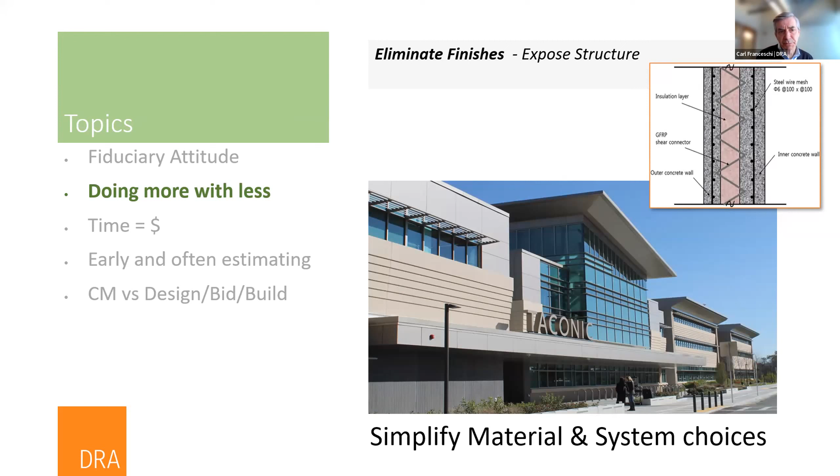That interior finish can simply be painted and become the interior. We discovered too, not only in the shops but in projects where we're stacking classrooms above shops, we actually use the inside concrete finish as the finish in those classrooms—so there's no drywall, no metal studs on the perimeter wall. Again, doing more with less, using one material and exposing the structure, somewhat the same way people are attracted to polished concrete floors. Why add a finished material? Use the concrete itself as the finish.

Particularly these days, as escalation and inflation affect our projects in a very serious way, saving time is a way to save money. And that includes in the design phases, of course, not just the construction phases.

A couple of things we do regularly are overlapping activities during the design phase. We're doing programming at the same time we're checking out existing conditions. We're doing conceptual design while we're still refining the program. There are ways to reasonably save fairly significant time during the design phase.

Thinking about the construction phase, which is generally a longer period of time, we try to simplify and develop logical, constructible sequences and procedures, material choices, systems choices. We find we want to include people on our design team, both in-house and out of house, who have that constructability and construction experience to have input.

In a lot of the choices being made early on, even in conceptual design, our project managers often act as construction administrators. They bring back feedback from the field so that we try to design buildings in a way that can be logically built, and built more expeditiously.

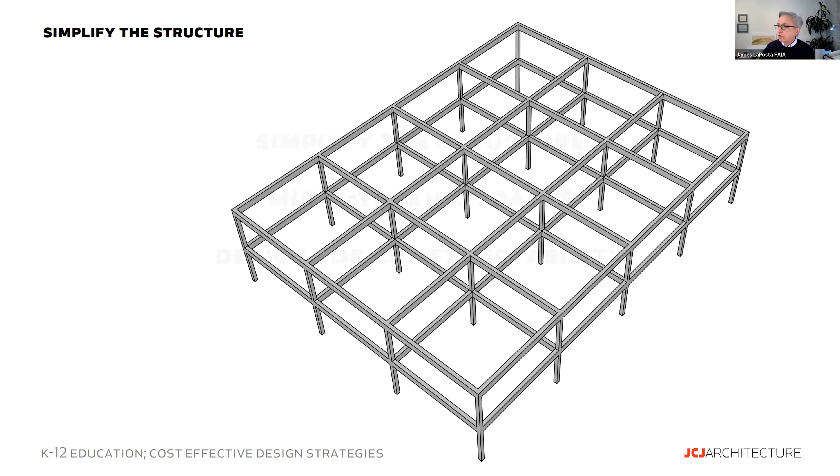If you've got a big open field - the hardest project I ever built was a high school in a tobacco field in Connecticut. I didn't know what to do with it. It was just a big flat open plain, and there was nothing - we were looking for a hill. I really wanted a hill. So the question is, what do you do then?

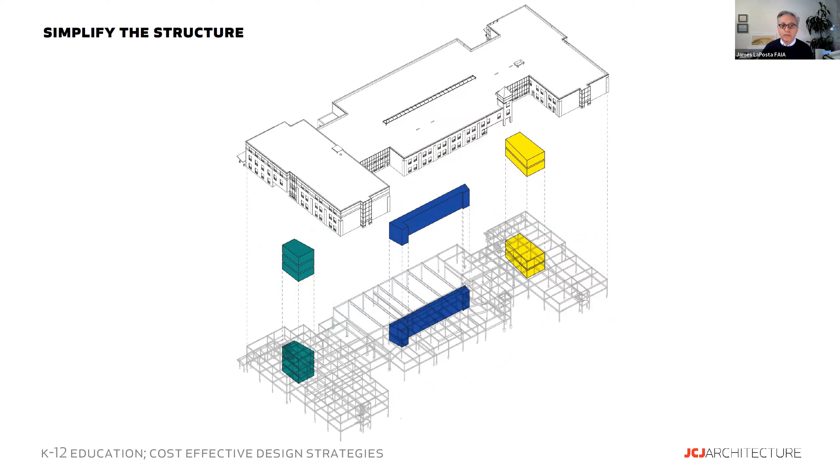You can carve spaces out, get a rigorous, simple grid, don't get too clever with it, and then begin to carve the spaces out of the inside and even expose the grid. This example at the Hunking and Haverhill was one where rigorous grids, simple building, but within there spaces that could still be light-filled, fun, joyous, letting some of the structure be exposed, getting interior daylight, getting flexibility, getting visibility - but you can carve away at those without having to really mess around with the structure.

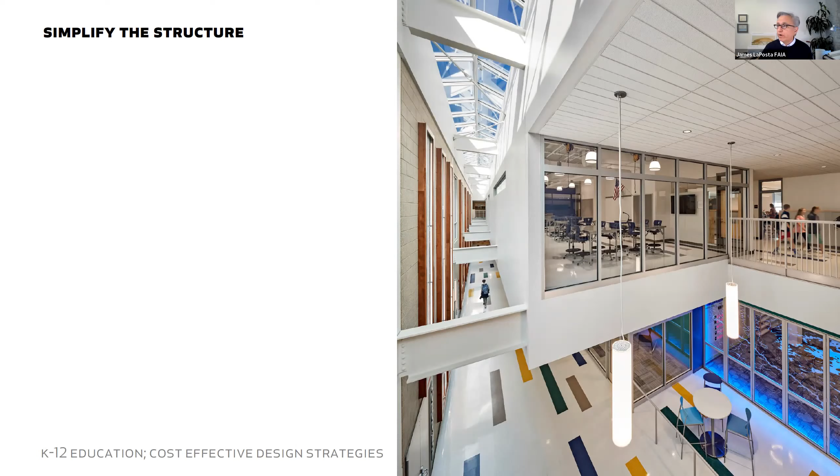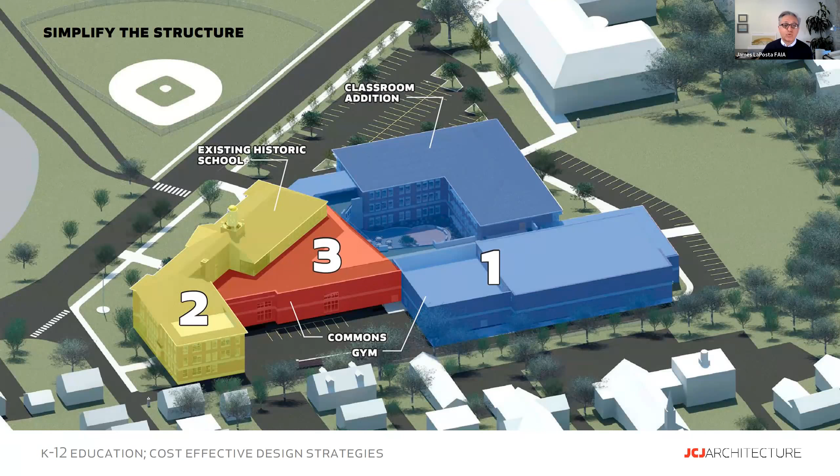That just becomes the residual space in between these really simple boxes to build. You're sort of connecting the dots. And this becomes a space that then is relatively inexpensive because you're not spending money - you're getting an exciting space, kind of connecting the dots, for the cost of a curtain wall and a few trusses, because the building around it is simple and easy to build. So you're able to focus your energies and your attention in a very, very specific area.

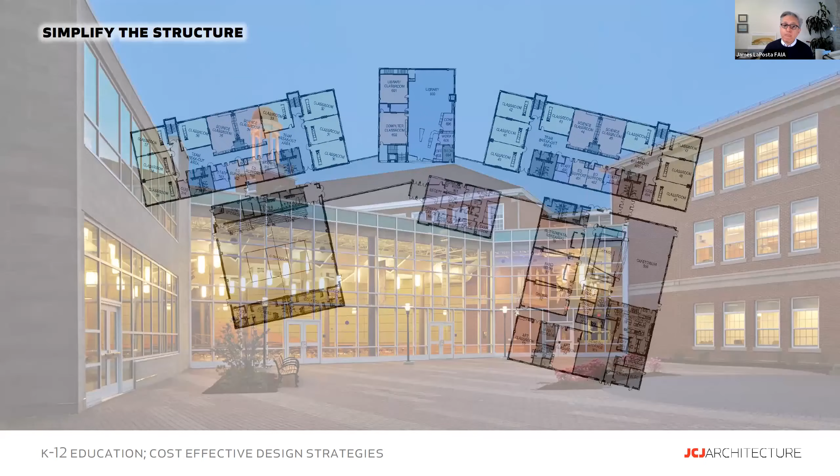This project freaked out the construction manager when we first showed him the plan when they joined. They saw angles and they were quite upset, so they thought it was going to be very expensive. This is an elementary school, but the reality is it's a series of boxes. So it's a new building taking that same approach of a simple structure. It's 6 boxes that are just connected.

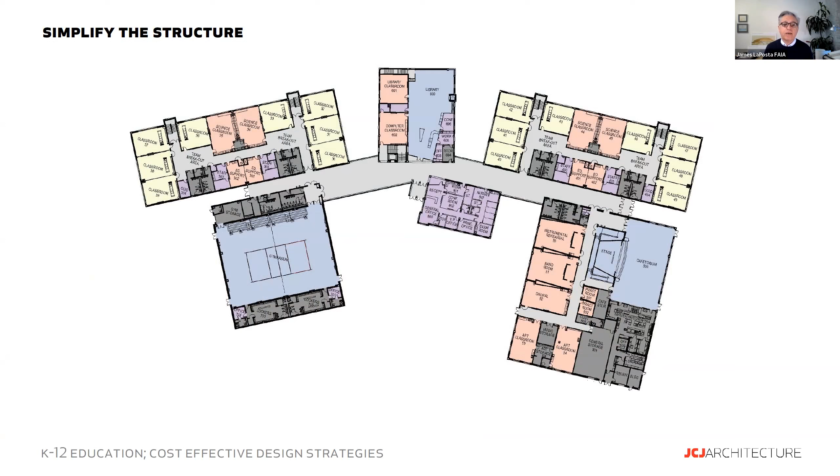Connected by storefront to create some exciting space. What this allowed us to do, by keeping the structure simple and repetitive and the form simple and repetitive, really allowed us to kind of go vertical and play around with the section, creating this village atmosphere really inexpensively just by connecting these simple boxes with storefront. It was just a question of leading the CM through this.

And once they understood the approach, they said, 'well, yeah, this really isn't too bad - we're building 6 rectangular buildings, and then we're just running a foundation wall and some structure in between.' And with that, again, in these residual spaces, you can create some really interesting indoor-outdoor relationships and maybe spend a little bit more on the connecting structure, because the structure in the majority of the building was extremely, extremely simple.

Last example for this topic is this project, a whole campus we just finished. This kind of gets at the time as money too. This is a really simple plan, for a Native American community south of Phoenix. This whole project is about 125,000 square foot elementary school, 14 months from the time we were hired to the day the school opened. That required a lot of early packages and thought about the structure and the systems available in the community.

So this ended up being a bearing wall CMU project with joists, and it had to be kept simple. As you can see from the plan, if you're doing bearing wall and joists, the more repetition, the better, the simpler it can be. It could be a really boring project.

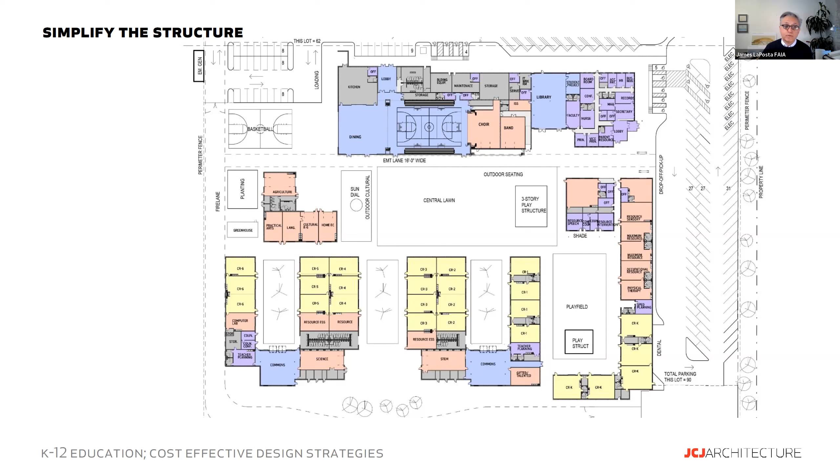Luckily, it's a lot of outdoor space, so you can take advantage of creating things like courtyards. But what this allowed us to do was have them build the classroom buildings and the base of this, and then have a moment in each courtyard where you could spend some money and do something exciting, because the rest of the building was so repetitive and based around the systems available in that particular community.

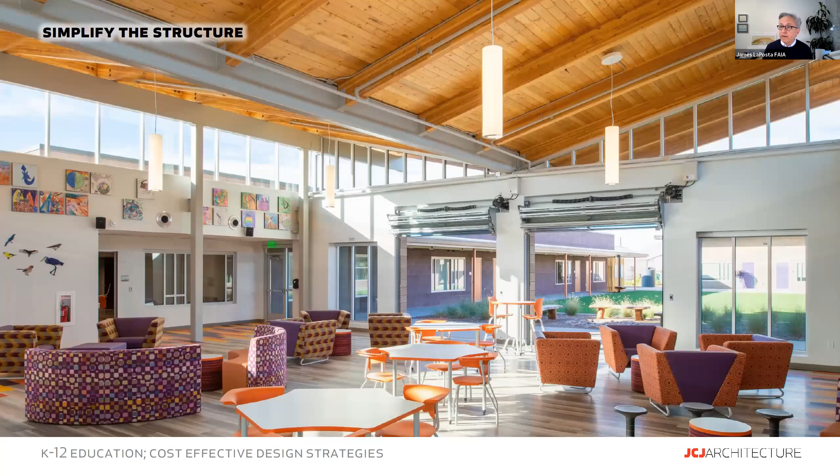So every cluster of classrooms ends up with a common space. And even here, it was a switch of structure. They were able to do the wrapper first, and then came back in later with the longer lead items in terms of the structure for these butterfly rooms. So this became a question of working early with the construction manager to make sure we were selecting systems they could get quickly, build quickly, and build cheaply. The repetition was really part of that.

But again, I think through section, you can begin to create some really wonderful and joyful spaces. So something we were calling multitasking spaces, very similar to multi-use spaces. I want to expand on that a little bit. In this case, this was a middle school that couldn't afford programmatically the choral room they needed. They had a big band and choral program, but programmatically they were up against the money.

So this was a case, as I'm sure we've all done, of using the stage to create an extra teaching space. But the question here really was, how do you do that and make it a real teaching space and not just a stage with chairs? That involved making sure it was on an outside wall, had a window, had all the things it needed, and then spending a little money on an acoustic partition between that and the commons, so that when it wasn't being used as a stage, it was truly a teaching space, which it is most of the time. They used it as a stage rather infrequently.

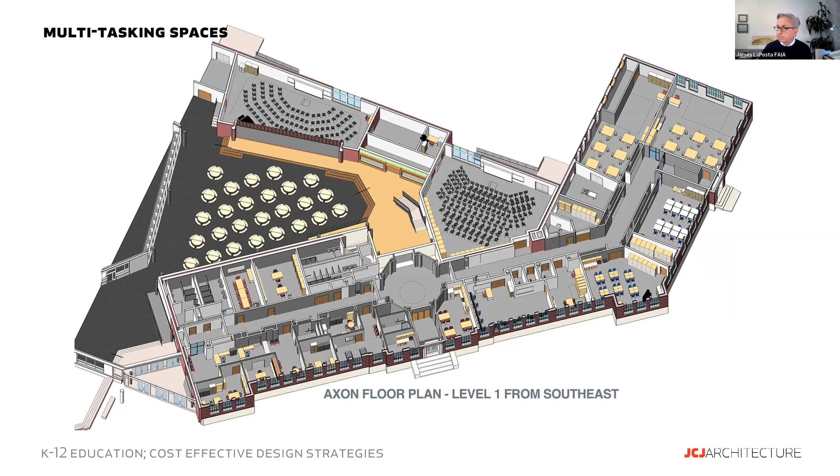So this is that space. Again, it's the residual space between some very simple masses. This is in the stage configuration. And then for lunch, when it's a classroom, it's simply a door that's got a very high STC. Spend the money on that detail as opposed to on an entire extra room. It's been a quite successful and rather cost-effective space.

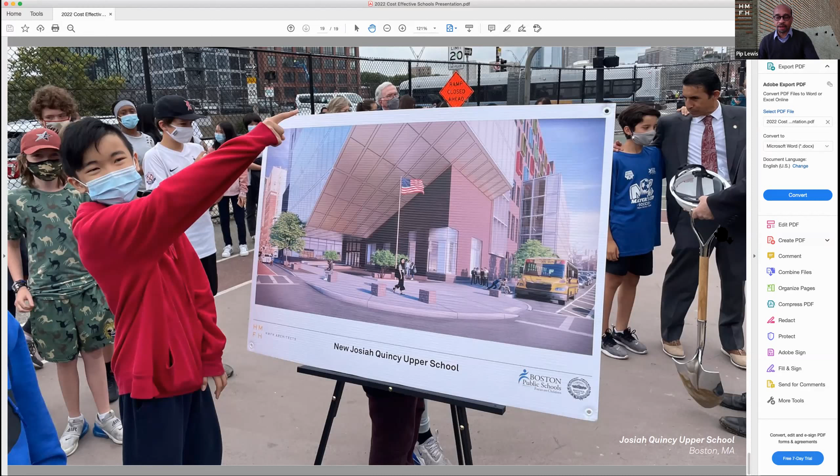Hey Pip, just want to make sure you're on the slide. I'm seeing the Josiah Quincy. Oh, let's see why that is. Tina, is that what you're seeing? Yep, there now you... So I'm going to unshare and share again.

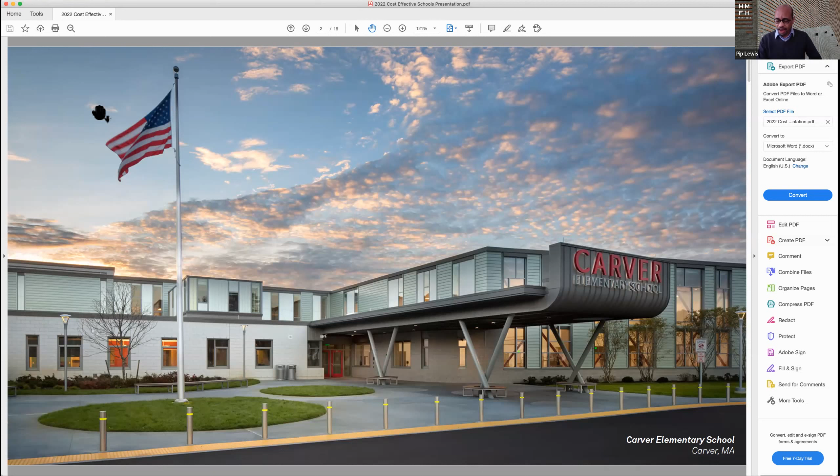Carver invited us into town at a time when they had this project voted down twice, so we really had to assure the community their money was being spent wisely. This is a story about very simple shapes, simple, inexpensive but durable materials. As was touched on by Carl, this is a pretty straightforward building on an open site, a two-story elementary school. It was done in Chapter 149, not CM at risk, but design, bid, build. We think the competition we saw there really helped drive down the costs of this project, which came in at $338 a square foot, and it was completed in 2019.

The building is clad in concrete block, which we use in a few different textures, colors and patterns in order to give it some life. It has moments of really inexpensive metal siding to accentuate that. Inside the building, we created this fantastic library that people really love, but really it's just a cube of old-fashioned Kalwall, to create this sort of crystal enclosure for the library.

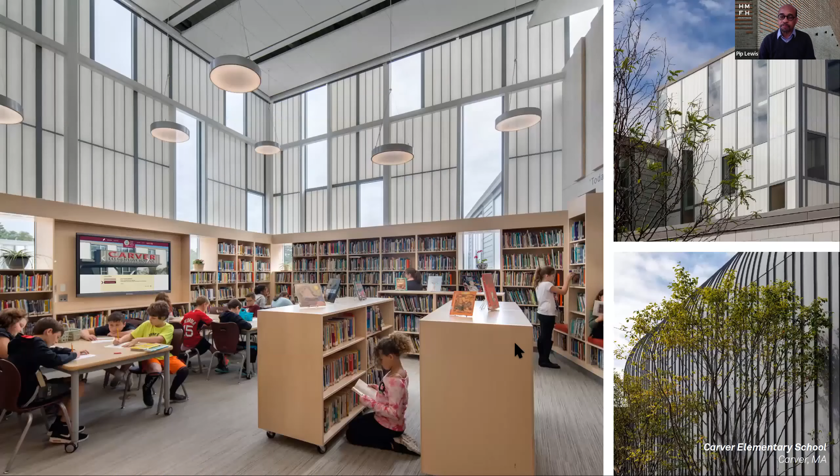Hopefully this will work, but here you see the concrete block building with a few moments of metal panel. And if we proceed, we get to the library, which is a Kalwall, an old-fashioned, I call it Kalwall enclosure, but in this case used to wonderful effect to create a really uplifting library inexpensively.

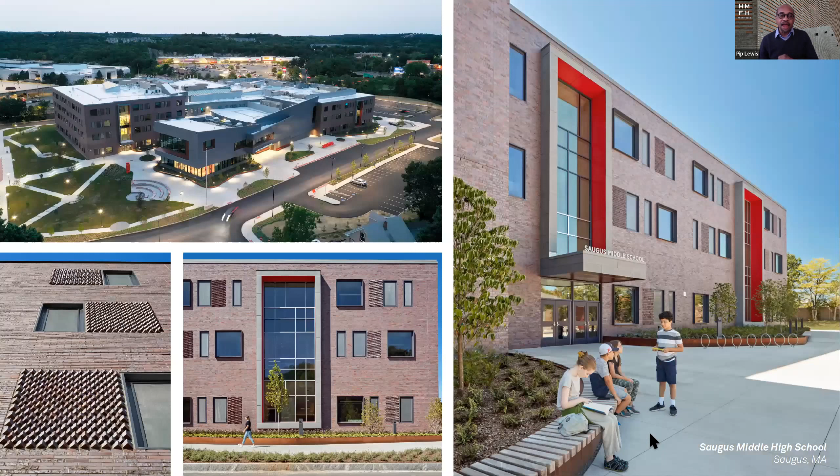But it's actually the element at the front of the building. If you look at the building itself, it's actually mainly a couple of large boxes of flat roof, regularly shaped brick-clad building. We have found that repeatedly, masonry, either CMU or brick, as we look at so many different materials to clad a school with, repeatedly comes up as the most economical. It's very durable and low maintenance, which I think is part of cost effectiveness. Another thing we find is that communities find it attractive and tend to love it and accept it very well. We're able to do certain special details, as you see on the brick, that can dress up a simple brick enclosure without causing a large increase in cost.

Inside of the building, just a couple of things to touch on, because the previous speakers went into great detail on how we work to simplify costs and get the best use out of space. One of the ways of ensuring a new school building doesn't look institutional is by the treatment of the corridor spaces. I just want to talk about durable materials here so it doesn't get beat up. We've found repeatedly that ceramic tile is actually still a very cost-effective way of providing a durable, long-lasting, and attractive way of protecting the surfaces on a corridor, particularly when a lot of the corridor space is taken up by lockers.

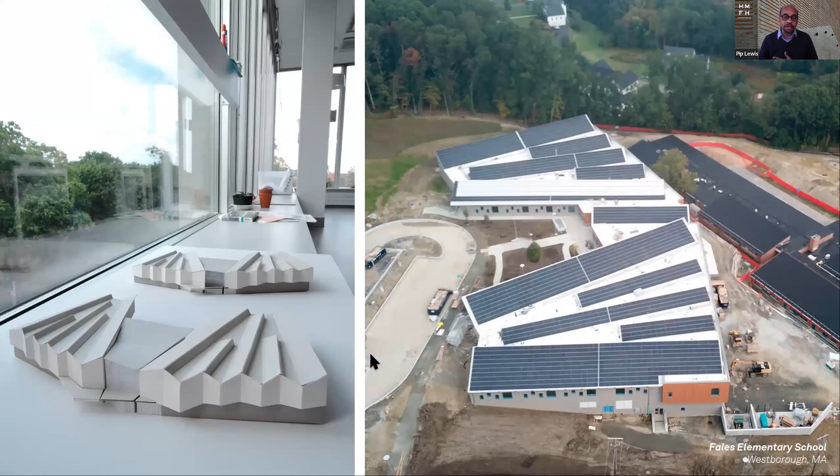The Fales School is an interesting project because the town really wanted to do a net zero building, and it's sitting on a steeply sloped, beautiful site with lots of trees around. So from the very beginning, we wanted to shape the building to take advantage of the views downhill to the east, and the sun to the south. That helped shape the way this building was going to look. It's occupied now, but the site is still coming together this spring.

The building, we're happy to say, has turned out to be not net zero, but the MSBA's first net positive school building, where we're generating more electricity than we're using. This was very important to the community. In order to do that, various components, geothermal and photovoltaics, had to be worked into the building.

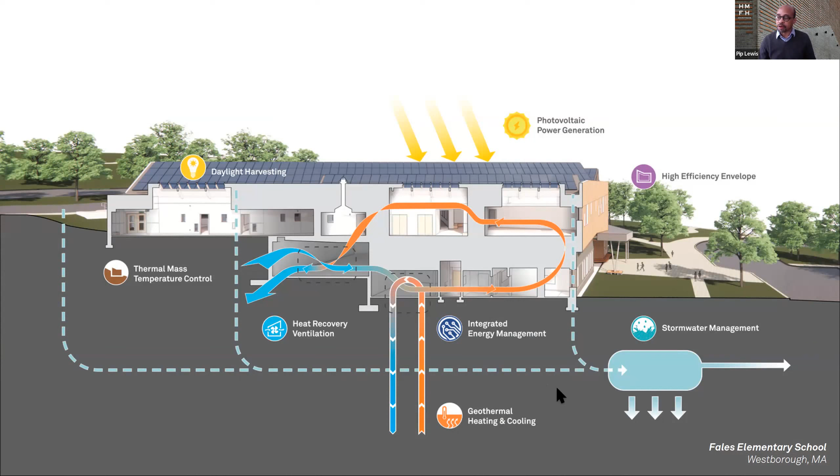We had to meet our budgets, which meant the cost management we needed to do for the project really needed to occur in other places. So what we did is, while we used some of this wood panel-like material - it's actually not wood, it's phenolic resin - to reflect the emphasis the school has on nature, we concentrated that at important places on the school. The main classroom wings are really large expanses of straightforward concrete block, acting as background to the emphasis we were trying to make. In that way, and with using the graphics inside, we were able to keep the costs of the building down. But I wanted to focus at this point specifically on the photovoltaics for the building.

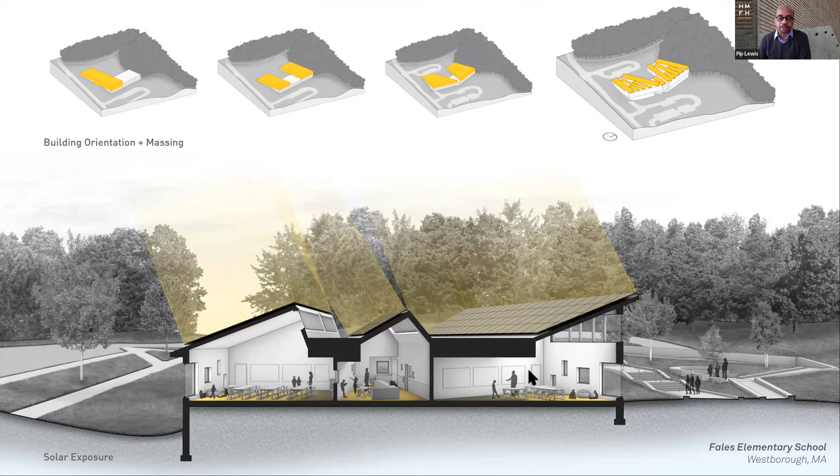The building is really designed around those photovoltaics, and the question is how the community could wrestle with the cost of paying for this system. The way I've traditionally looked at it is a simple payback model: you take the cost of the system, which in this case was a little over $1 million, and look at the annual savings of the energy made on a yearly basis, which was $172,000. In this case, that meant it would take 6.2 years to pay back the cost of the $1 million investment.

So would the community go for this? Well, that's a pretty good number for Westborough, but 6.2 years to get your money back - the answer was maybe, maybe not.

But the town and HMFH looked at it very differently, because we realized that in actuality nobody puts down $1 million to pay for photovoltaics or anything. This is part of a $50 million project that was paid by municipal bond over 20 years. So the community said the real thing they want to look at is the impact of that $1 million on the photovoltaics, financed over 20 years, compared to the energy it's generating.

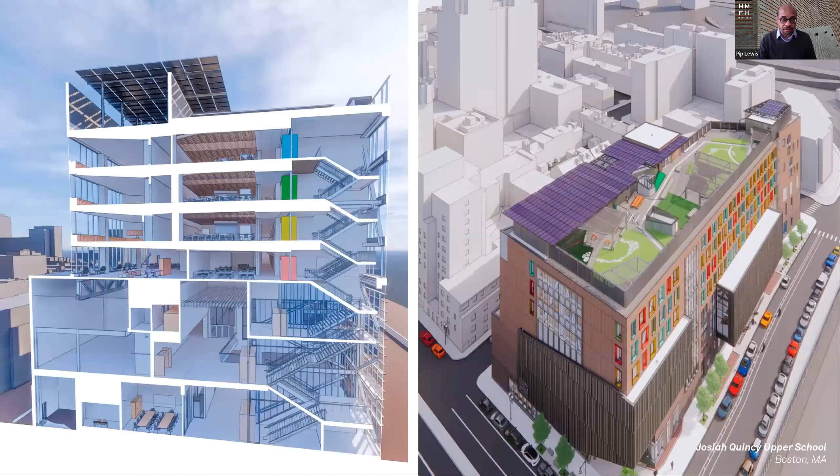Talking about the complex urban projects. This is the Quincy Upper School, which is just starting to come up now in Chinatown of Boston. And as you see, it's a high-rise school with a pretty complex section indicated here. And we have attempted to put what photovoltaics we could on top of the building while sharing the rooftop with an open air educational space, because this is the only open space that the project will have.

And we found we were able to squeeze in some, but even that we could get in was pretty expensive because it had to be built on steel structure supported over the rooftop HVAC equipment.

And so when we look at the numbers for that, it's very different than what we saw at Westborough. While the system itself costs about $600,000 to build, we were generating about a third of the electricity that the Fales school was actually generating. And with a 20-year bond for the city at a 4% rate, the cost of that was $42,000 per year, which is still sort of favorable compared to the energy generated at $69,000 a year.

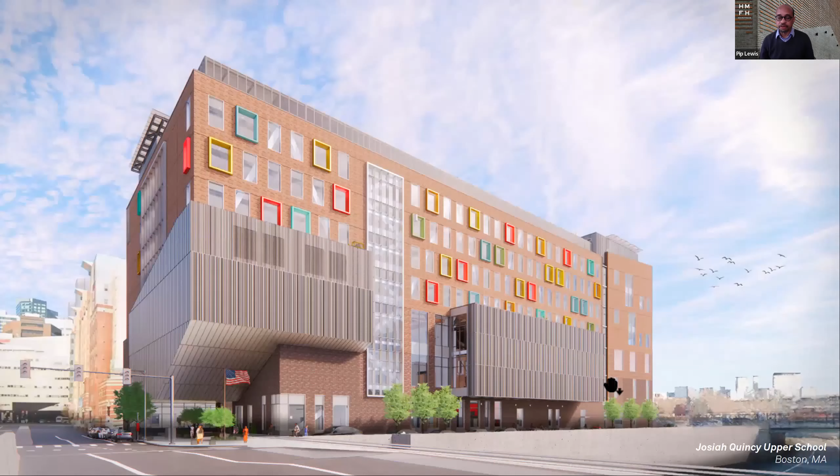So the city determined that no, the savings here are too modest. They would take that $600,000 as one of many value engineering measures that needed to be taken in order to make the building come in on budget. So we are doing the building now without the photovoltaics.

But we also had to, in order to get on budget, we had to cut back the size of that rooftop open space that we have. It's still there, but smaller than what we were hoping to do.

And what the city hoped would be a slick glass box sitting on top of these beautiful terracotta masses became, once again, like a lot of public schools, a brick masonry building. That was the most economical way of building this, even in downtown Boston. And the terracotta masses became an industrial metal siding where we just mixed up some standard profiles in order to give it a nicer look than usual.

So remarkably, we have been able to stick to the original budget for Quincy Upper despite the difficult times that we're working through. And it's still scheduled, despite the supply chain problems, to be open the summer of 2024. So it really was the pandemic that sort of forced the city and HMFH to really look deeply at ways to make this an extremely cost-effective building in order to make it actually fly.

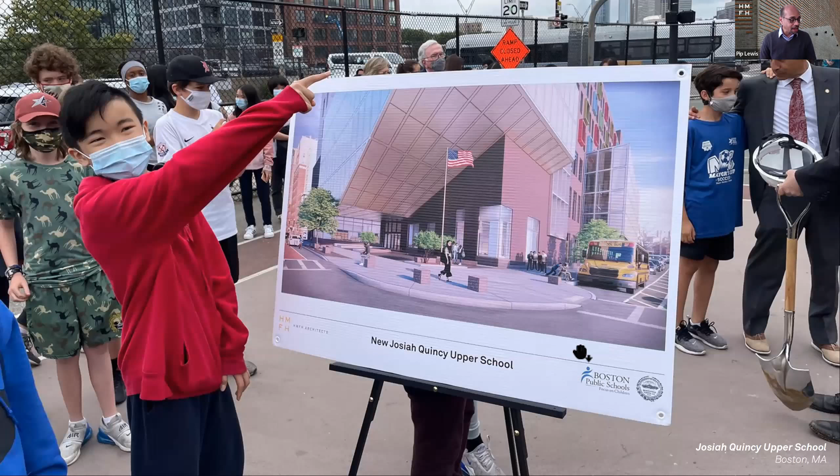And so the ground was broken last fall, and you can see this third grader here is very thrilled and looking forward to when he gets into the sixth grade, and he'll be able to inaugurate this first exciting new full service middle and high school in downtown Boston that really was shaped by the cost effectiveness that was imposed by the pandemic in a funny way.

And that's my presentation. So thank you. Sorry for all the technical problems at the beginning, clicking on the wrong thing to share.

No problem. That's great. That's really interesting, Pip. Thank you so much for sharing. It's good to see the kids at the end of it too. So last but not least, Frank Tedesco will share.

Frank, I don't know if you have slides or. I have a couple of PDFs I could put up. Okay. I share the screen. Can you see that? Not yet. Let's see. I don't know how to put this up on. I don't know if another option, Frank, would be if you wanted to email it to myself or Tina. Okay. I might be able to pull it up. All right. So.

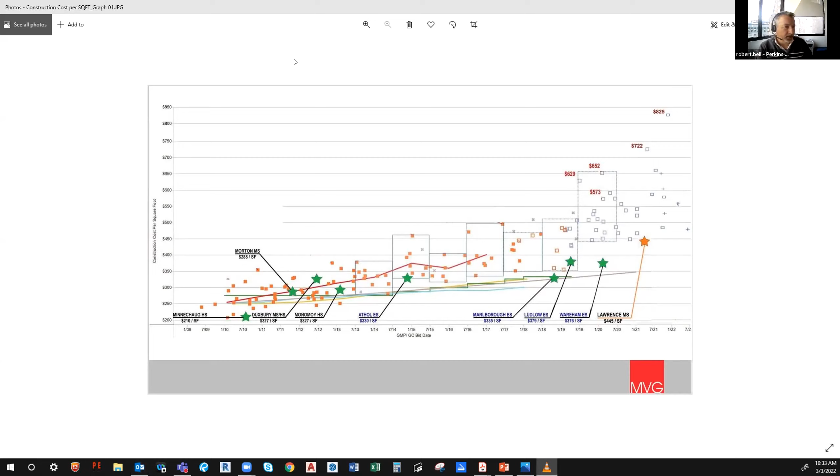If you could, I have a short video of that project that I sent you. Rob? Yeah, I can pull it up. There probably is going to be an audio issue. I'm not sure. No, there's no audio with it.

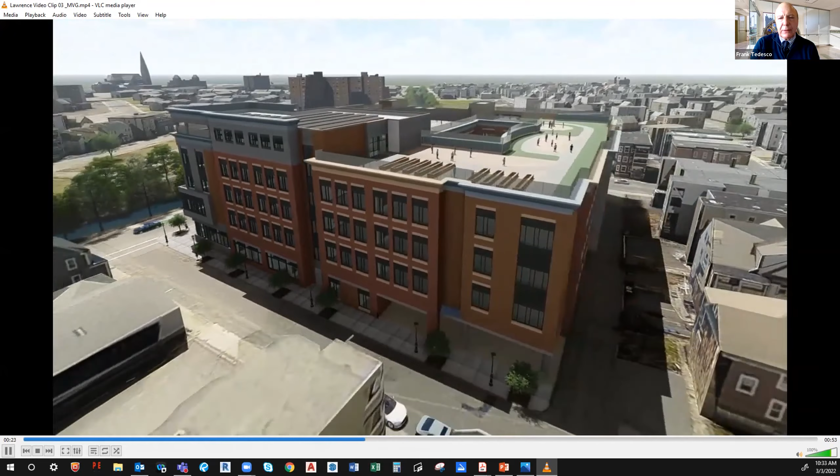So this is the new Leahy Elementary School in Lawrence. As you can see, it's a curb-to-curb urban project with all of the urban issues that you have in any city, where you really don't have any site space, no laydown area, and so forth. The project is at $440 a square foot. It has a rooftop play area and various other things that need to accommodate the students in an urban setting.

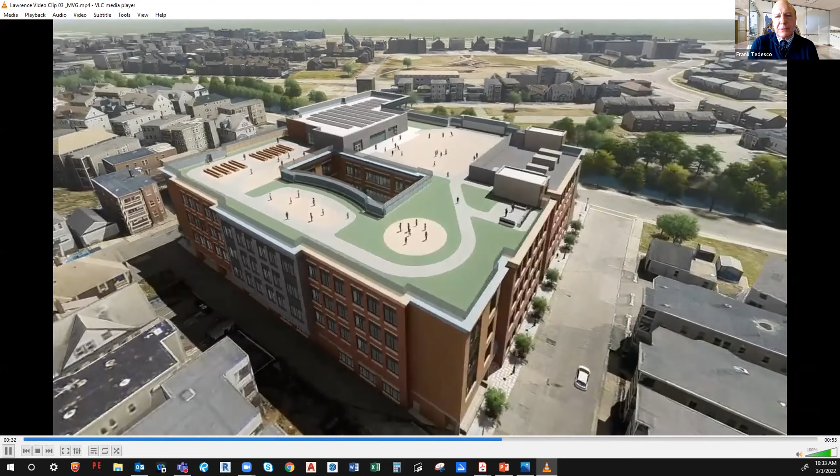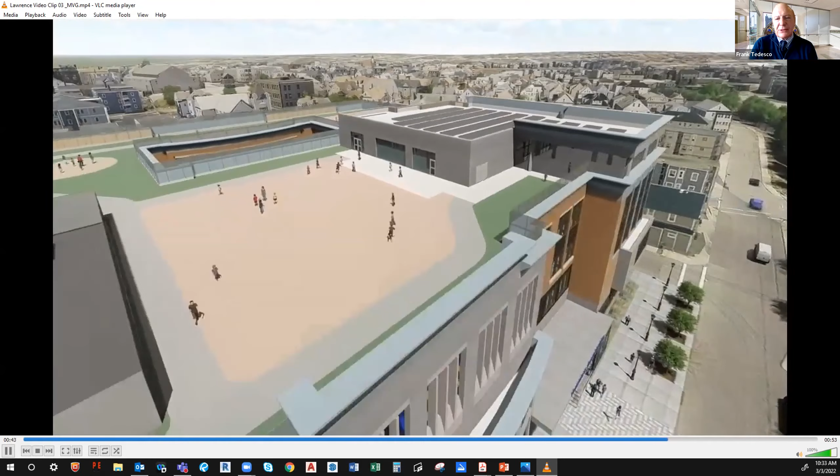My point is, even though that was showing the lowest cost of all of the projects in this cycle, you can see that this is not an inferior project by any stretch of the imagination. So I would say that that would do that.